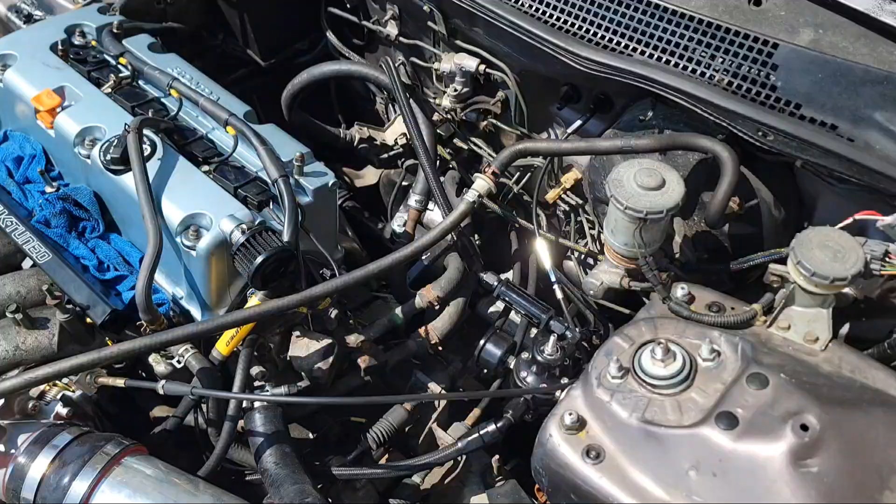So as you can see, it's a K-series. This one is actually on Link. We not only support tuning on Link, but we also are dealers. So if you're looking for some Link products, let us know.

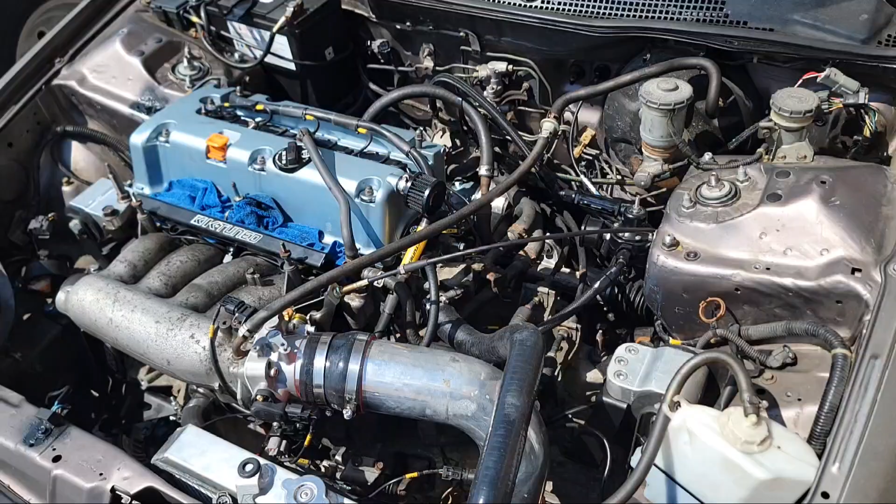So this one came in, as I stated, it was on a trailer. I was under the impression it was running and driving. I will say the customer did ask if we do offer the support once you pay for the tune to help out, but then we never got an email back from him. As far as I saw, I looked at my emails, there was never ever a responding email.

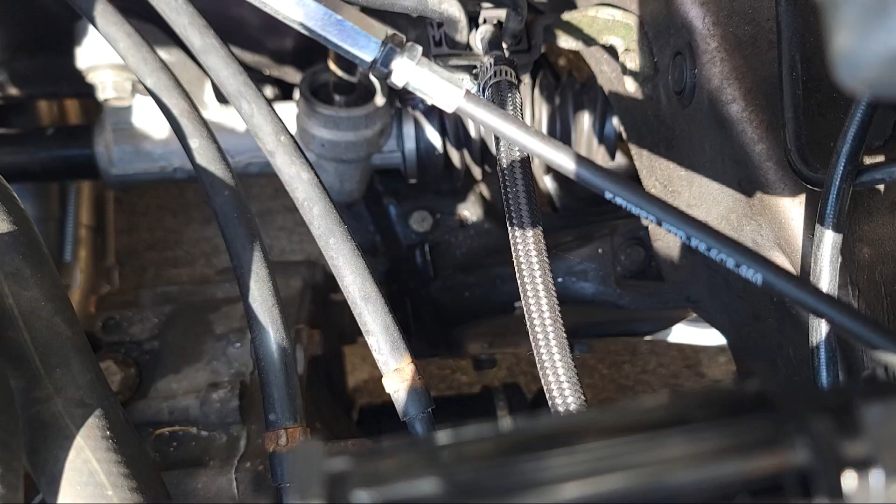So right off the bat, there was a couple things that were wrong. One of the things that we noted was, and forgive me again, I am outside, as you can tell it's bright. I'll do my best to try to remember to turn my camera around and press that button.

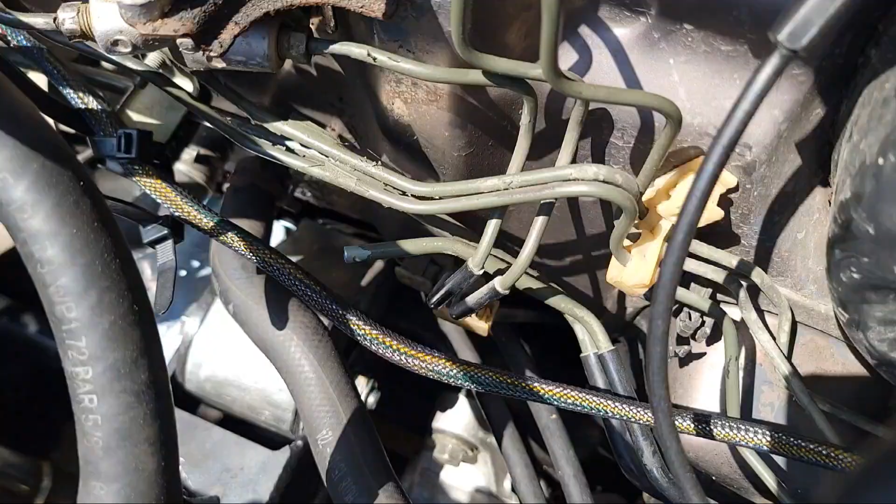If you watched last week's video, then you know what I'm talking about. The fuel line was originally hooked up to the evap or purge canister line. The customer was here, he wanted to stick around and see if we can get it running while he was here. So we did walk in and we asked him, hey, is there a reason why you have it hooked up here instead of the actual return line?

His response was, unless I'm dumb, I don't think I do, something like that. So he walked out, he saw that it was hooked up incorrectly. When we took the line off, the amount of pressure that was built up, it was unreal.

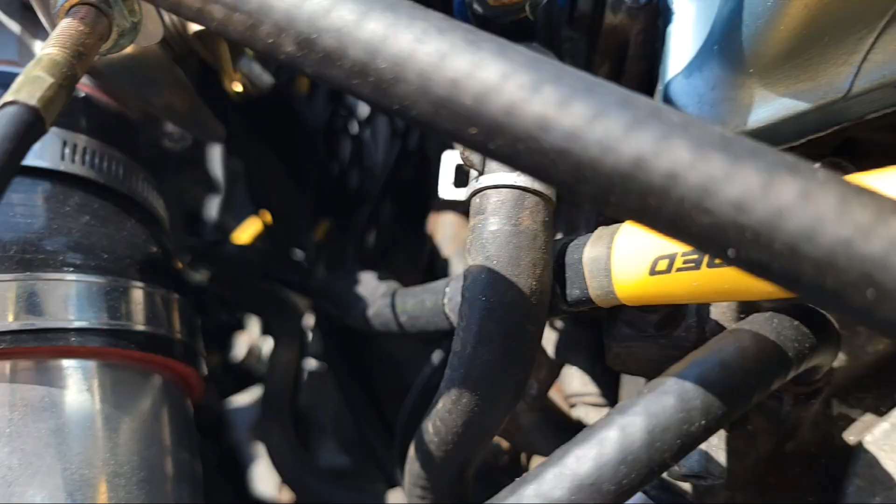The other thing too, I know his IACV was leaking, just leaking coolant. From what we could tell, on the stock throttle body there's like a provision where the gasket sits. Well, there was none on this throttle body, so the gasket was just kind of smashed out, had nowhere to go. So we simply took it off and threw some Honda Bond on it, let it sit.

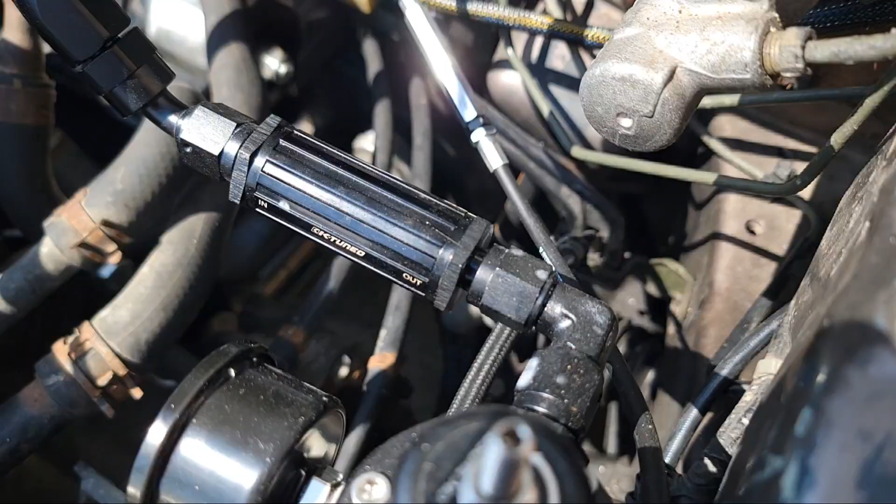There's other little stuff too as I'm in this engine bay. These fuel filters, if this is your first time watching or you're new, these tiny fuel filters, I don't care the brand, don't run them. You run something larger, they get clogged, they're just notorious for having issues.

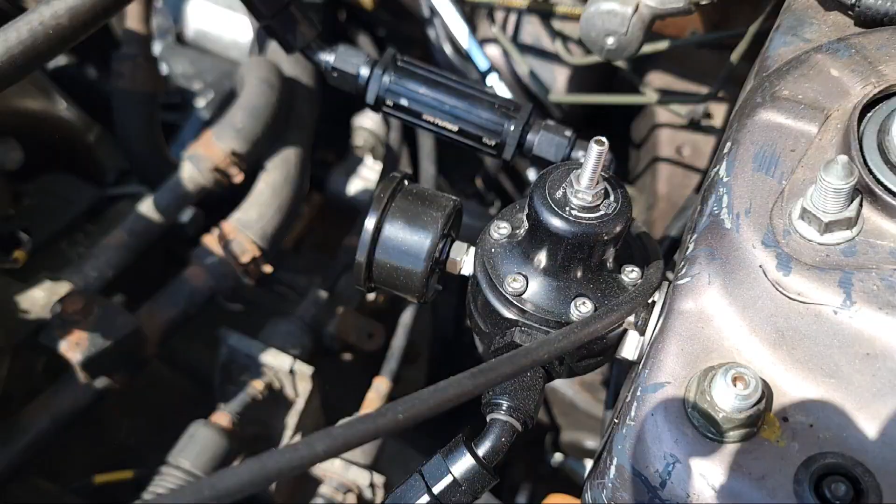I know I have some other stuff too that I'll mention. Oh, the one thing too, when I went to go get in it, he said something like, you know, the car is going to smell inside because his cats have been using it for a litter box. And the window's like RTV'd sealed, so that's kind of fun being inside this car and smelling that.

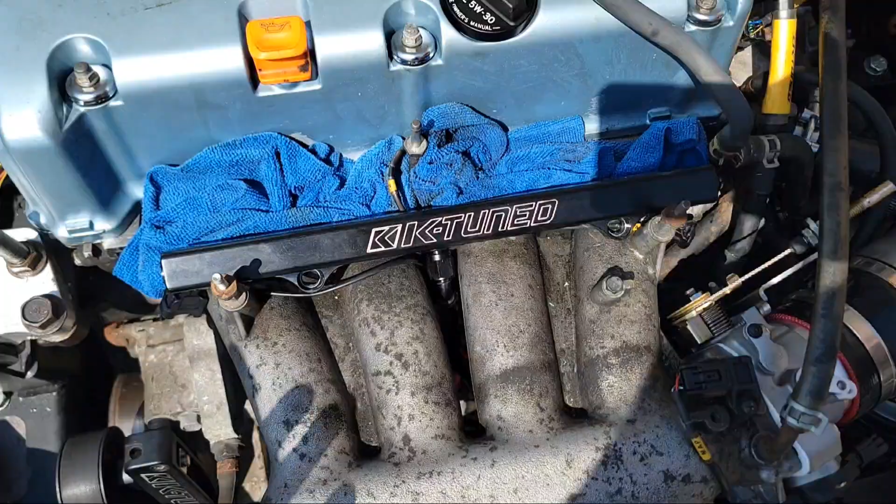We have the injectors out right now because when we did get it started, we were having a bad misfire. Let me get inside really quick because it is too bright for me to even see what I'm doing here. So my apologies, it's really bright, I can't even see my screen, what I'm recording.

As I was saying, we did get it running. Once it was running, it was misfiring badly. We spoke to the customer, of course he heard it because he was in our showroom. He was excited, he said that he did the valve adjustment, the valve lash. He wasn't really confident in it, so that's where we started. It was out of spec. We got that all set up. Still misfiring though, which leads us to now the injectors being out.

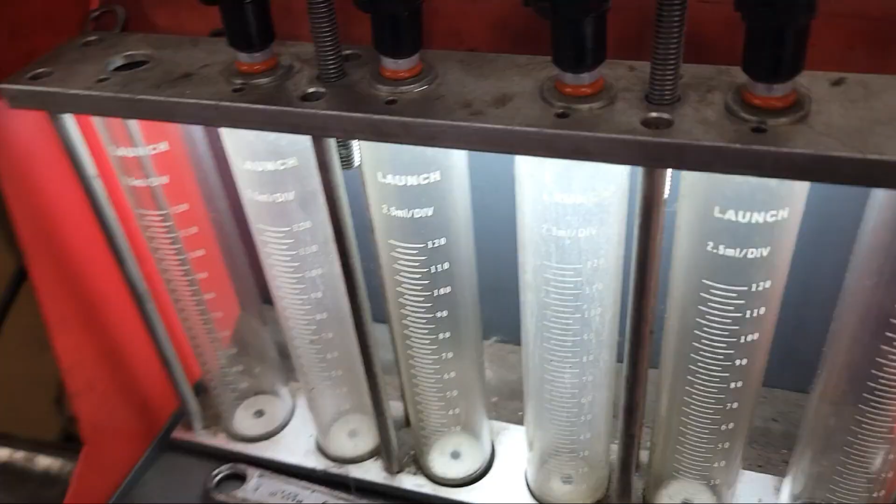We have them in the machine. Let's go over there, show you guys really quickly. So we got the injectors in our machine, we're going to test them. We do multiple tests in a sense. We do a leakage test to see if they're actually closing all the way. Flow test, self-explanatory.

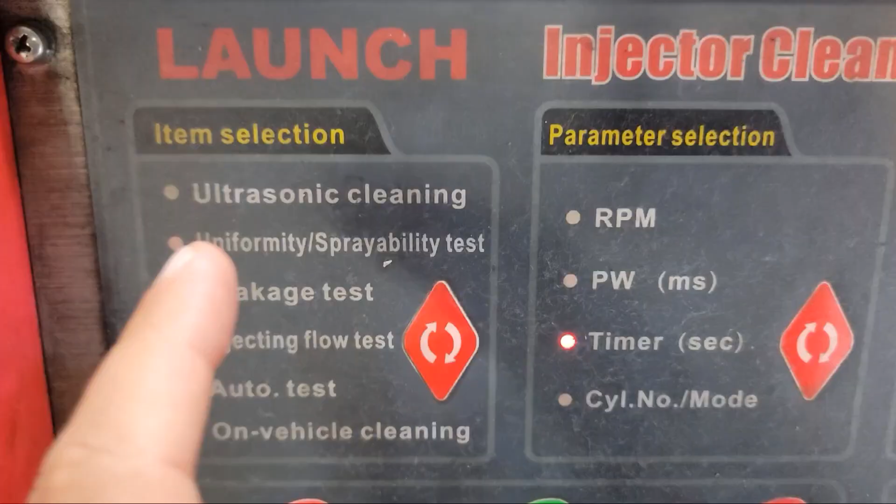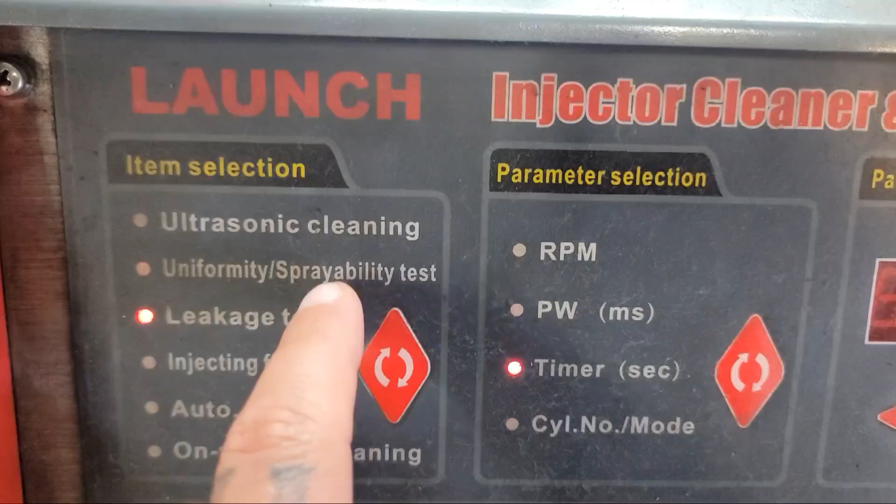Sprayability uniformity test. That's going to basically show how good it's spraying. When you get cheaper injectors, that's one big thing that is affected in a sense. So I'm going to get out of the way so we could do this test, and then I will give you guys the results.

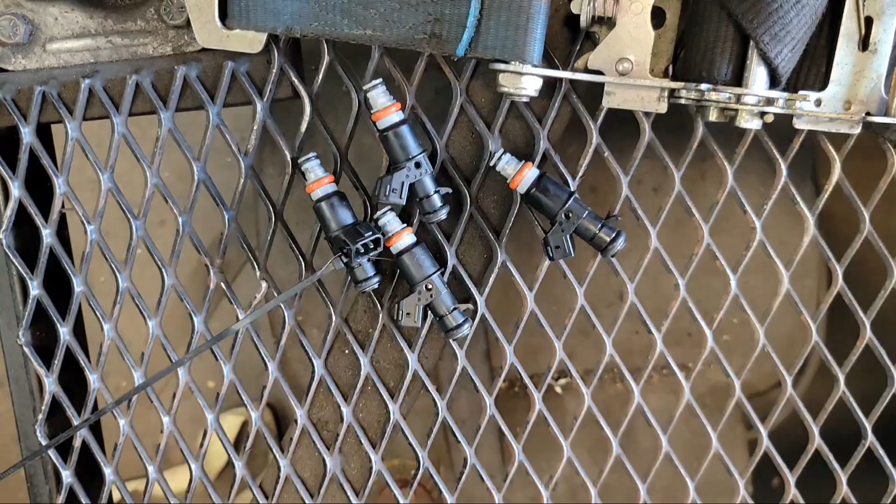So the injectors did fail our test. One of them is completely dead, not firing, which explained the misfire. Customer was expecting this, he said, because these are $70 injectors. So at this point, we're not going to reinstall them. We're going to wait to see what injectors he wants to get and buy. I gave him a link recommendation to Fuel Injector Clinic injectors that we sell and recommend.

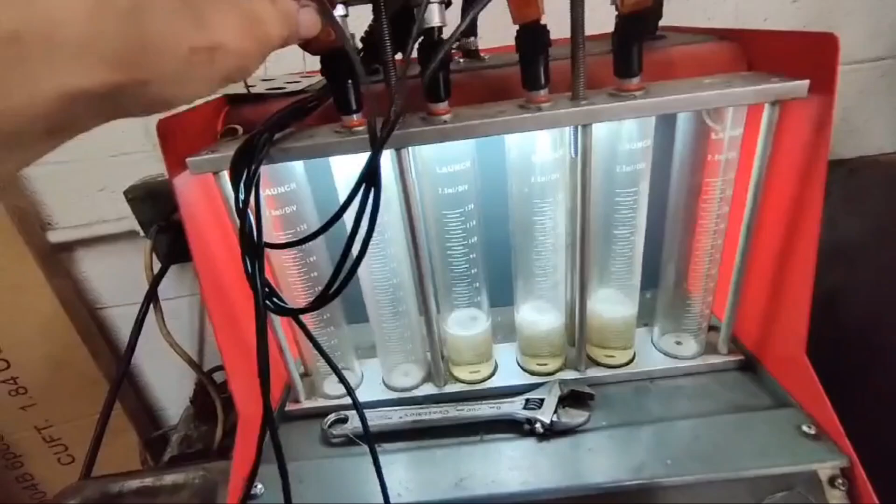So that's where we're ultimately at on this one. If you watched last week's video, I will try to send the link down below, post the link down below. If you didn't, you can see another car that was supposedly ready for the dyno. It is not. And now another car we have to diagnose. And, you know, it is what it is. I really can't say much more. Go watch the other video because it's literally like a repeat. We're going to get on to something else here. Let me go find out what we're going to cover, keep the video rolling and whatnot. So let's see what we got here.

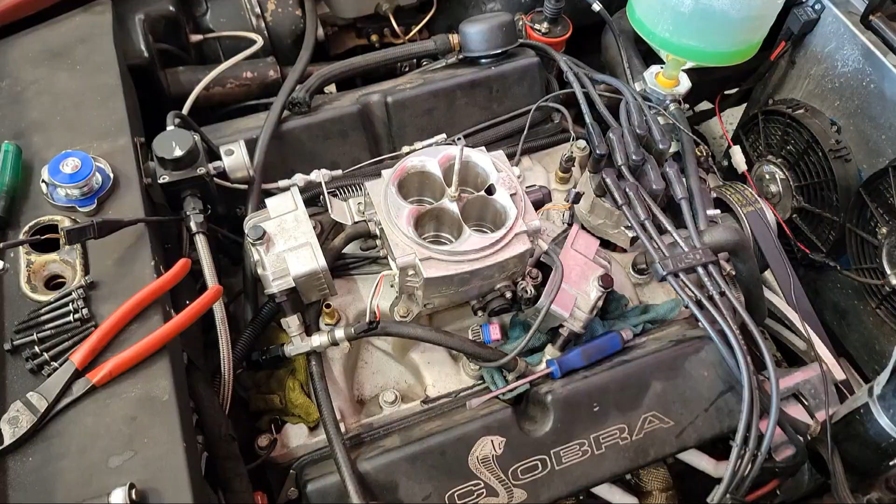So, as you can see, standing in front of the Cobra, we got to take it apart a little bit. Got the sniper unit and the injectors out. And we have my cable because I built a tune for the car. So let me give you a little bit of an update on this.

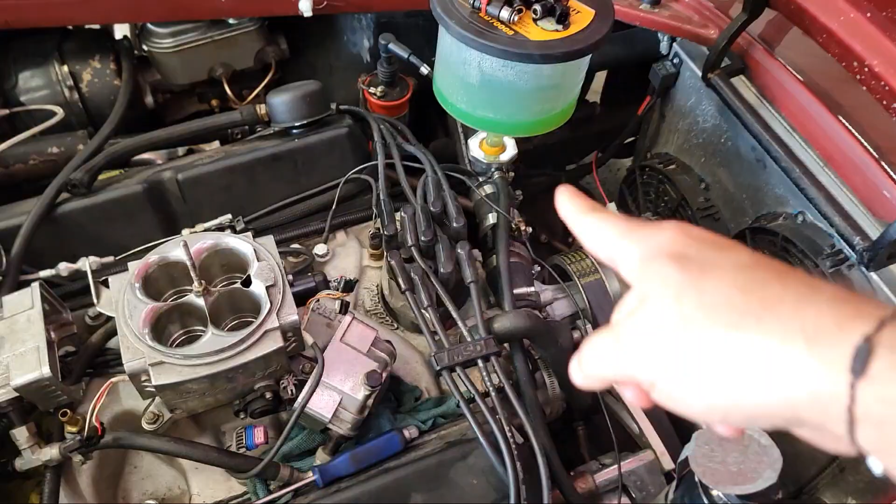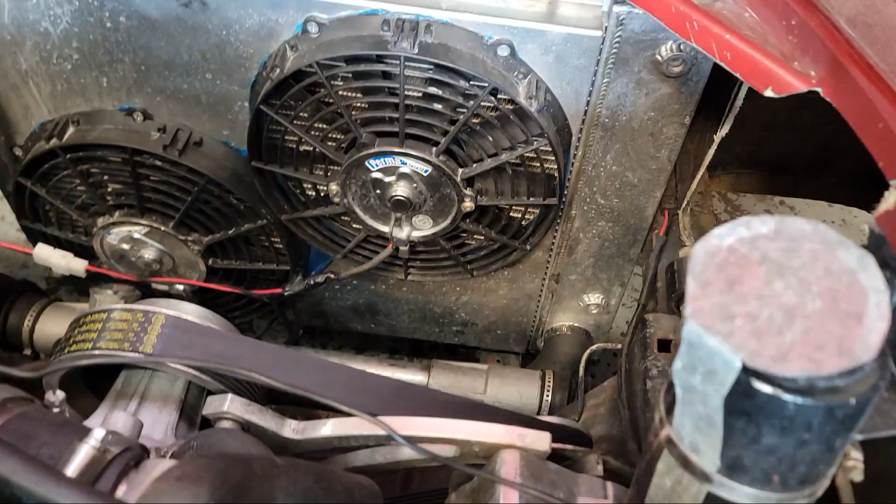We finally got a water neck that actually would accept the funnel. There's really no other way to bleed this car. I talked to the customer. Realistically, what should be done is if this car goes down, let's say for the winter time, the radiator should be modified so we could basically make a swirl pot. Right now, we don't have the time to fully take the radiator out, make a custom swirl pot. Probably going to need some custom flanges made for the water necks, all that fun stuff.

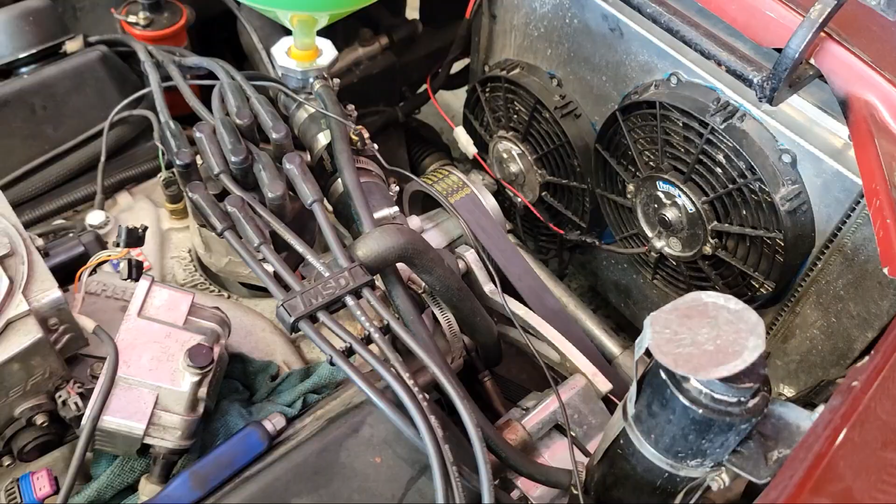So going back to it, we added coolant. The engine, the setup alone was just low on coolant. That wasn't the only problem, but it wasn't helping. I don't know if the other shop just did not bleed it out. I don't know, I really can't say. Once again, if you've been catching my recent videos, I'm only presenting what's in front of us, and you can be the investigator on why did the other shop not fully fill it with coolant. It could have a leak too somewhere, but right now we're not seeing any leaks.

So anyways, we had it running and starting on my tune. So the air fuels are running a lot better. If you don't remember, and I will shoot the link down below to the one video I did on this car, the air fuels just at idle were running super lean, and ignition timing also was reading about 2 degrees at idle. So that is fixed. The car is running a lot better. It doesn't want to overheat as fast as it was. We let it run for about 20 minutes. It did not overheat, but the car also, the engine has a misfire. So that's where we're at right now.

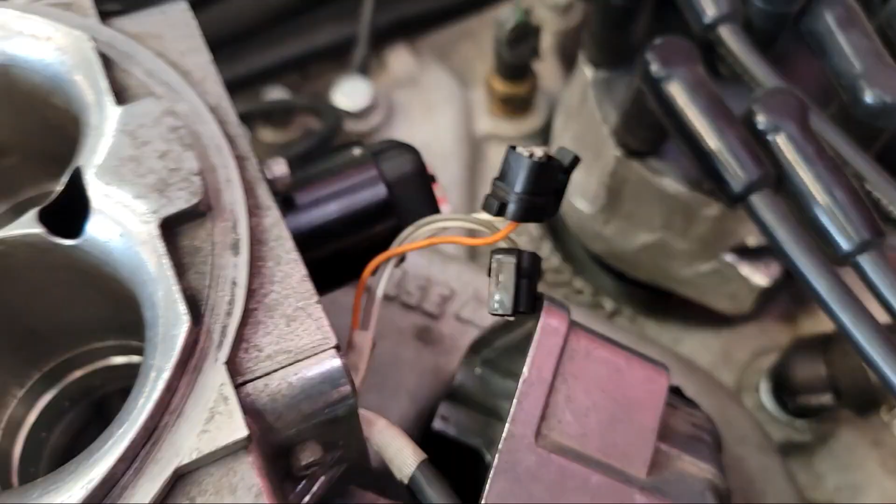Now, if you're familiar with the sniper units, then you already know what I'm about to say. If you're not, well, these injector clips that Holley installs are a horrible design. Not only are they not serviceable in a sense, you can see how they look completely sealed. They're super fragile, they like to rattle loose and then cause a misfire. And before we even took the injectors out and the clips, you can see that clip right there is going to break.

So we're hoping this was the issue. The injectors tested good. We're hoping this is the issue, and the only real solution is to zip tie these on. So we're going to zip tie them on. We're going to get it started back up. We're going to see if the misfire is gone and proceed from there.

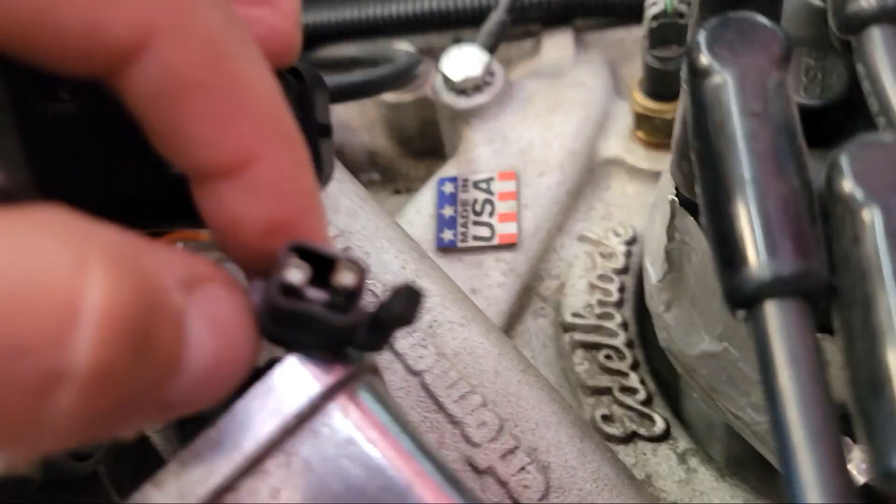I'm going to show you, though, I talked about this before. Let me show you the previous tune that was on this setup, and let me go over some key points on why it's not appropriate.

Okay, so I have the program open. I have his original tune that he sent me, and I want to go over this now. I'm going to go over some basic stuff.

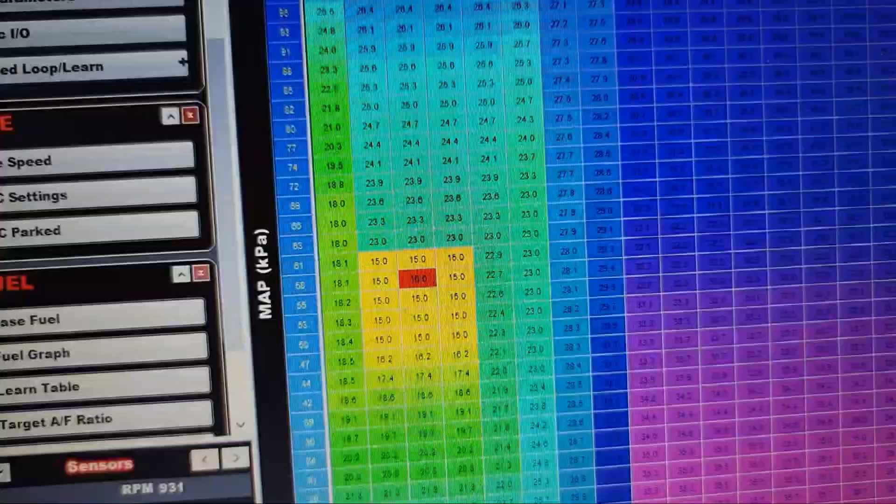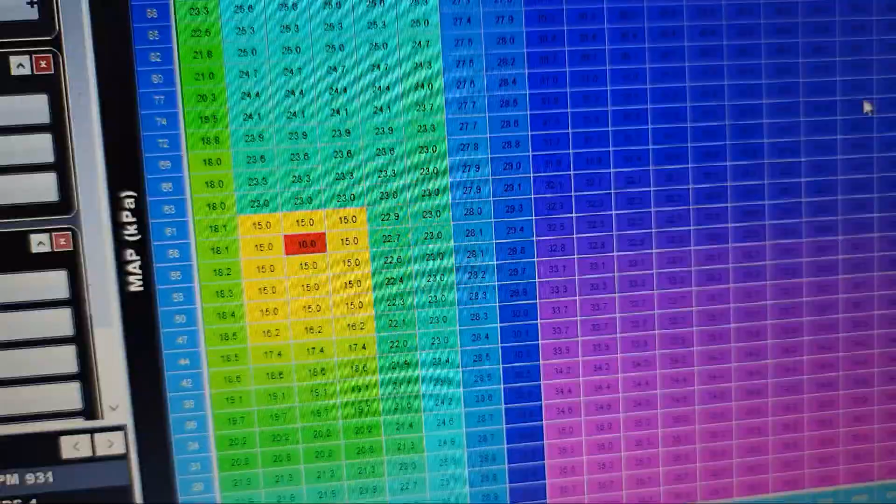There's other stuff too that was messed around with in the tune that you should never, ever mess around with. Why it was messed with, I don't know, and neither does the customer. When I was speaking to the customer about his previous experience at other shops, his response was that the guy who tuned it is supposedly a well-known tuner, and he informed me that when he was asking him questions, the tuner himself acted like... don't question me, in a sense. You're an idiot for questioning my knowledge.

And that's the whole thing. I don't care what you're doing, in a sense. Once you act like that, you need to get out of the industry. You need to get out of the car stuff as a whole. Your job is not only to tune, but it's also to educate and inform your customer. That's my mindset. For anybody to act like they're better than somebody just because, for whatever reason, it's not okay. It's not right. I'm a strong and firm believer in that.

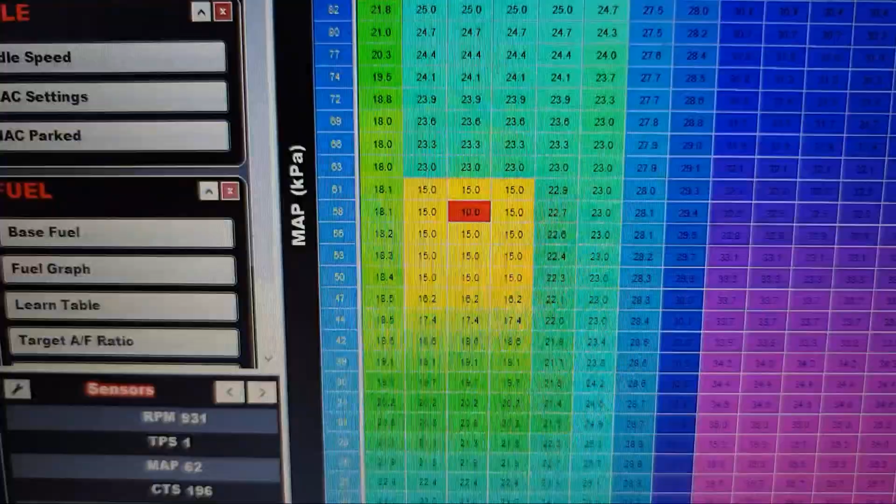What we do, every industry has their own person. Let's talk about a chef. Do they know how to do certain stuff with experience? Sure. Can somebody else learn that over time? Yes, of course, absolutely. It's the same with welding, same with engine builds. When you start acting like you know everything and question it, I don't know, man, it's really hard for me to describe without swearing. Let me flip this around. Hopefully you guys get what I'm saying. It just upsets me, it truly does. But going back to this.

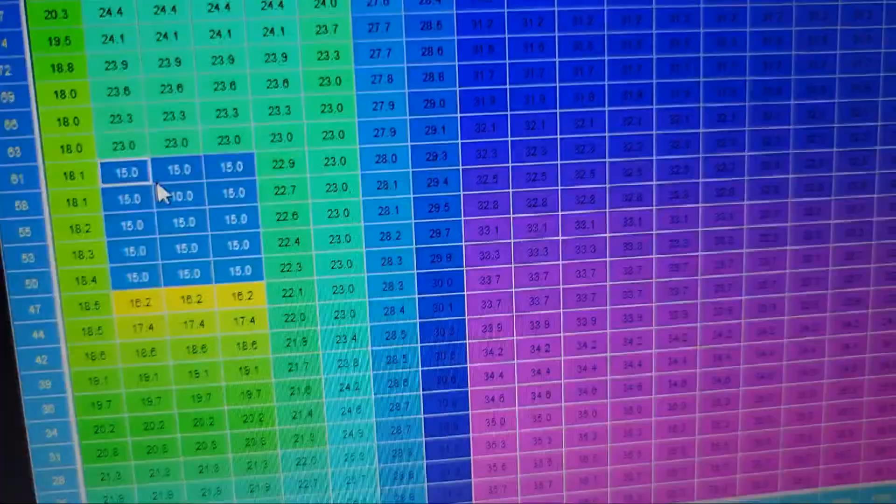So we're at the spark table here, and you see how the spark is laid out. No clue why that 10 is in there. But here's the other thing: if this was a normal standard vehicle, yes, it would be idling possibly around here, or more so in this area, it could be idling up here. But what I'm trying to say is this block of squares - a normal car would idle around that block of squares. This is not a normal typical car. It has a cam, it's rowdier than most.

So realistically it's going to probably idle around here, depending on how fine-tuned you can get the idle to be. Some cars, no matter what, depending on the setup and the cam, it's going to want to fluctuate. So what I'm trying to get at, and have you guys think about here, is it's going to fluctuate from here to here to here, possibly maybe even down here. So the idle is going to be bouncing around this whole time, which is not ideal. And like I said, why does he have a 10 in the middle here? No clue.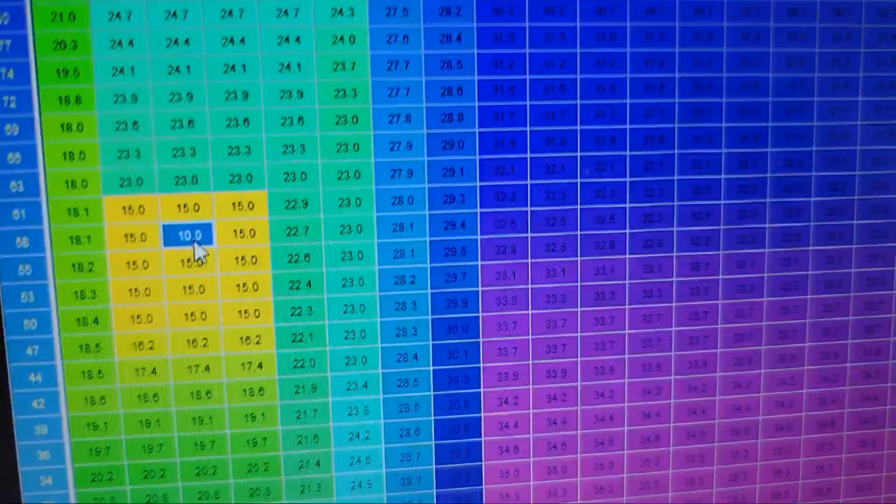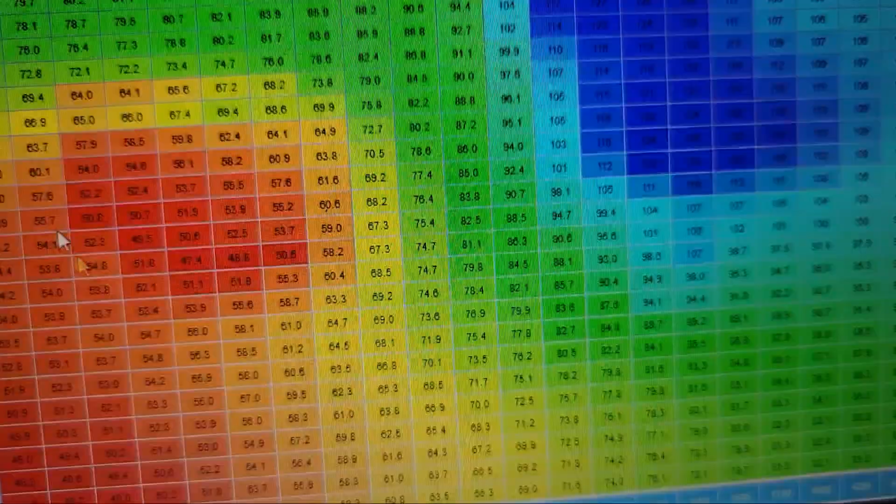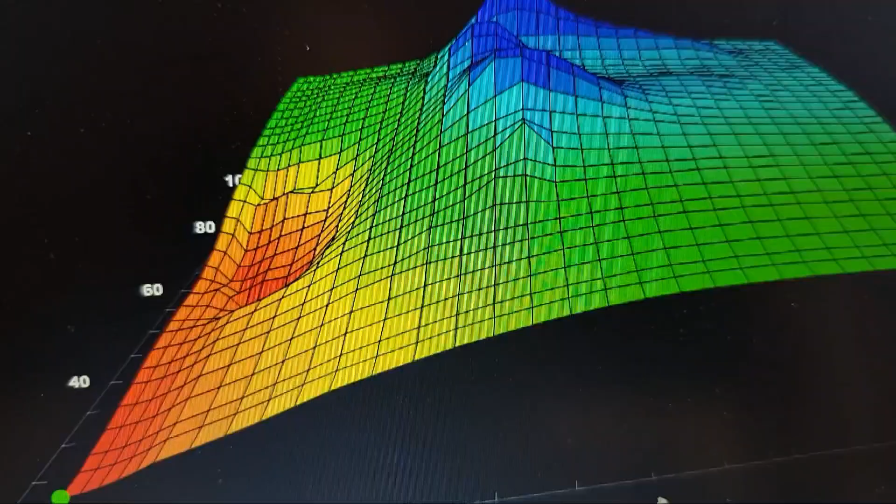Let's open up the fuel injector side of things - the fuel map. Okay, so this is the fuel map. Now if you don't do this day in and day out, this may kind of look normal to you. This little area is going to be where it's idling and whatnot, but let's change this to a 3D version of this. Okay, so if you're not familiar with how a fuel map should possibly look, I don't want to go into the crazy detail, but this area could definitely be a lot cleaner. Let's just say that, let's keep things simple.

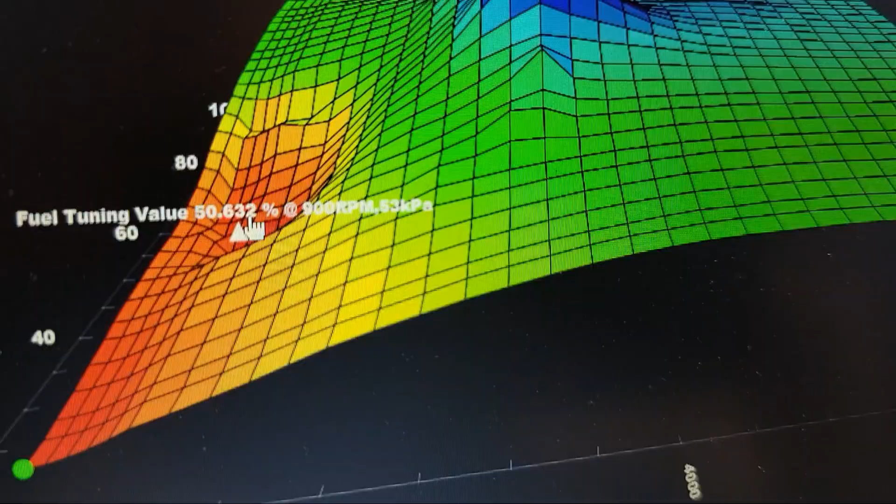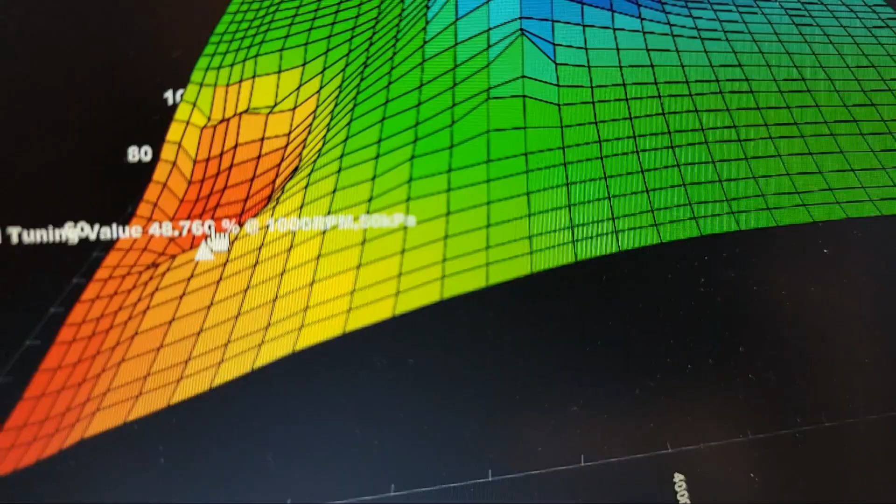But now you see in the idle area how much fuel is being pulled out, which right off the bat, as somebody that does this day in and day out, this little area would possibly raise an alarm. Now, once again, if the tuner was open with the customer and informing him, giving him his knowledge of 'hey, I did this because of such and such,' but he didn't. Now keep this table in mind, because this is a big part that's coming up.

So, before I show you this next table, I'm going to add here: most people that don't do this day in and day out are under the impression that the car should idle at an air fuel ratio of 14.7 - that's where people think every car should idle. That's not the case, and I spoke on this a couple videos back when I was doing this car. V8s like to be a little bit richer in certain areas. It is what it is.

It comes down to a point where you're not chasing a number at idle, you're making the car happy. If the tuner told him, hey, this is what your car wants at idle, this is why I did it, just to be open about it. But once again, the tuner was cocky and acted like, how dare you question me? Let me show you something highly important here, the biggest part of it all.

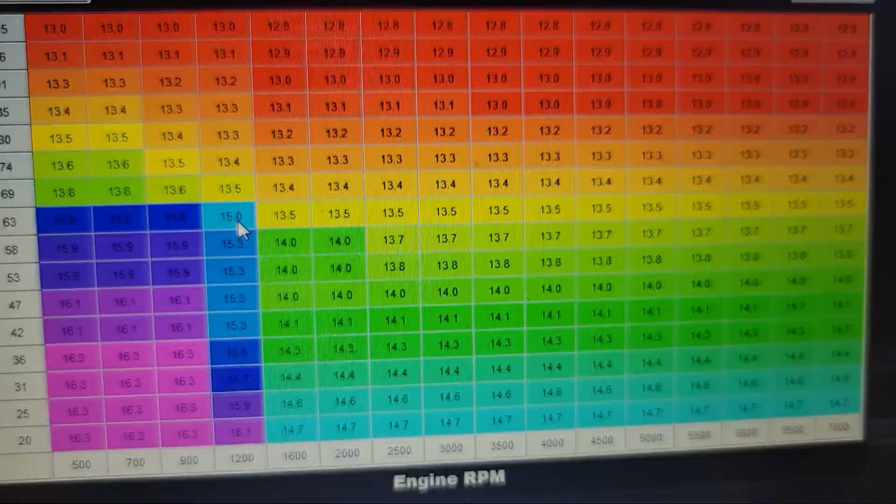So this is the big shocker to me, and it makes absolutely no sense. This is the target air-fuel ratio, what the computer is going to target in closed loop, or as Holley calls it, their self-learning system. That's how Holley advertises it. I talked about that before.

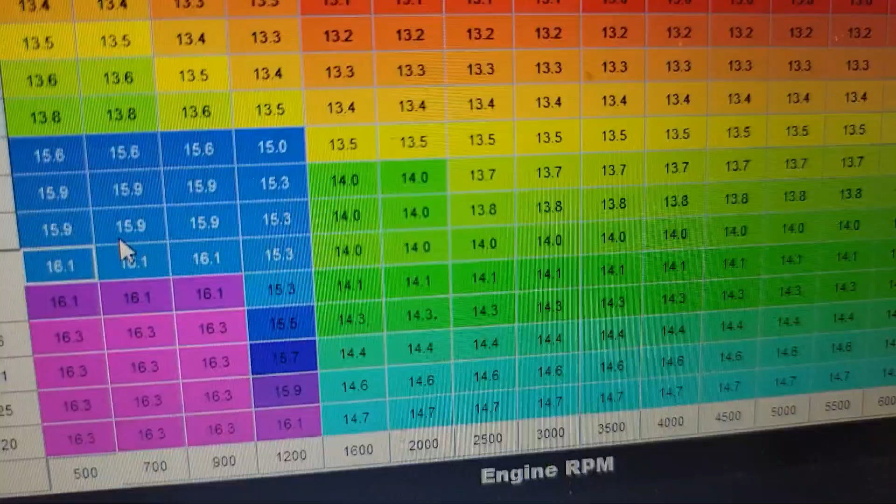Most people think 14.7 is where you want to be at idle. If you're not familiar with air-fuel ratios, the higher the number, the leaner the car is. At idle, we're roughly going to be around here, give or take, and it's commanding 15.9, 16.1. If you go back, I'll have the link down below to the first video I did on this car, you'll see it was idling at 15.9, 16, even higher at times, as the car was trying to stabilize itself.

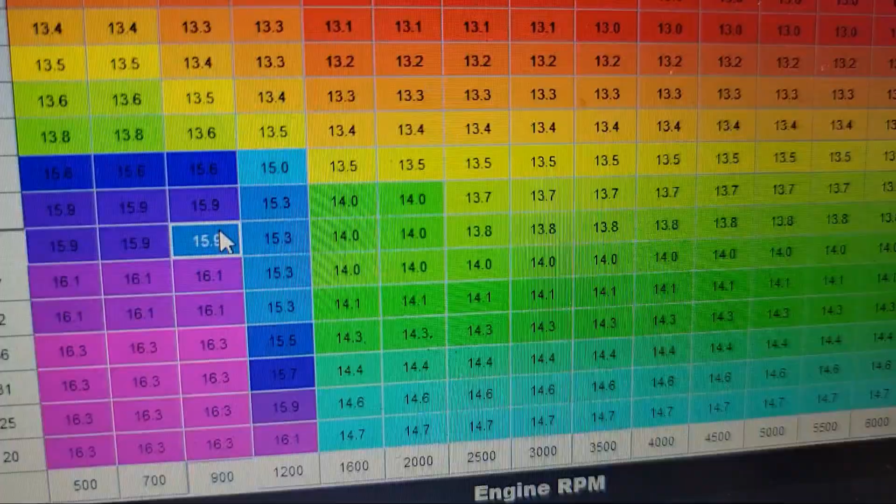That alone, and I spoke about it before, is going to make the engine possibly run hotter and cause an overheating issue. So think about this.

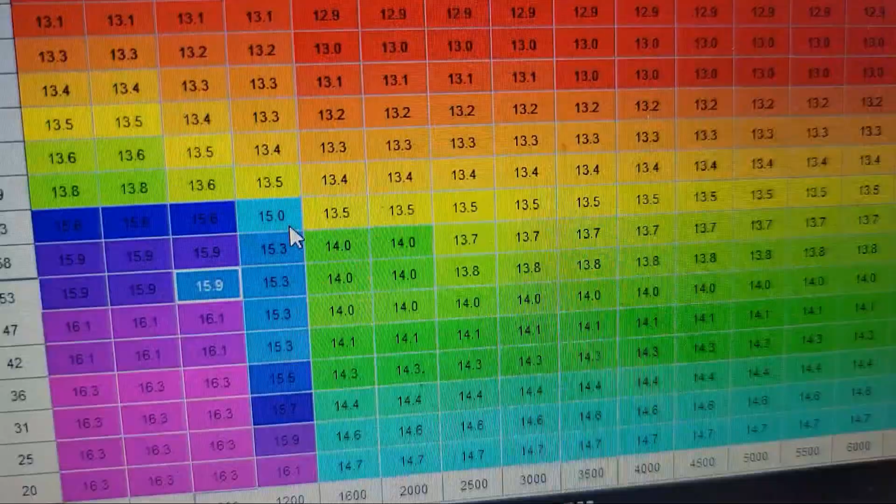Think about it as a whole. This guy has 3 radiator fans on the car. Number one, at the 3rd radiator fan, when you're installing it, there needs to be a point in your head where it's like, hey, I'm band-aiding the issue. What is going on here? Now there could be some other stuff involved with this overheating. I'm not saying it's all on the tune, but the tune's not helping.

I will add that I already have my custom tune on it, and I've been dialing it in at idle. The car, it's a night and day difference, not only how it feels, but how it sounds as well. There's other stuff in here too that just makes absolutely no sense. I don't know why somebody would do it, if it comes down to just being lazy. I truly do not know.

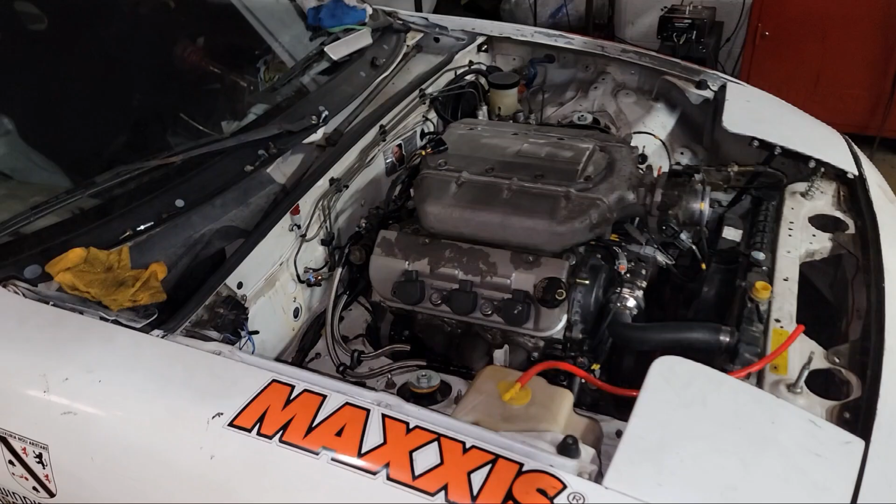Give me one second here. I wanted to take a break there. It really angers and frustrates me, I don't care what line of work you do, when you act like you're better than people and you can't give them proper information.

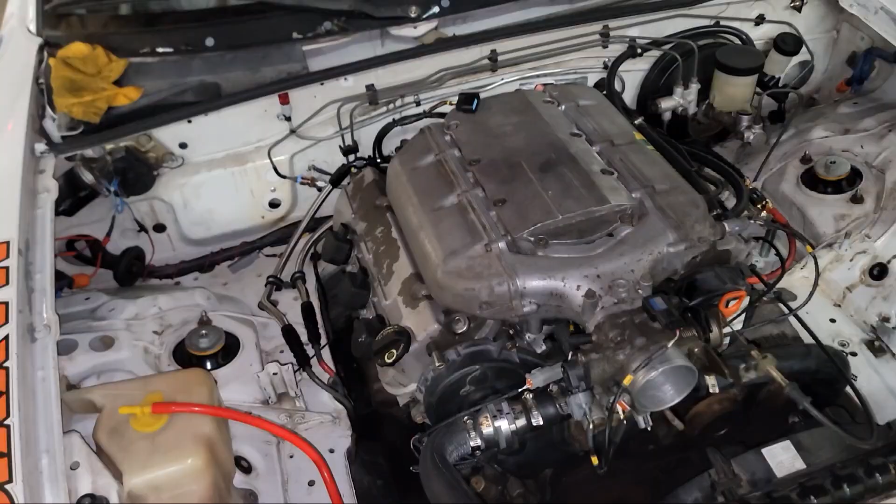I want to go back to this one really quickly, we had some people asking about it. This kind of goes to what I was talking about. We went to try to fire this thing up, and it turns out it's basically not the J-series we thought it was. Speaking to the customer, there was some confusion on his end, and he apologized. What it comes down to, though, is we know it wasn't his fault, and he knows it's not our fault. It's communication, just understanding each other in a sense. So we have to basically modify the trigger wheels to make this thing want to fire. It is what it is, we'll get it done.

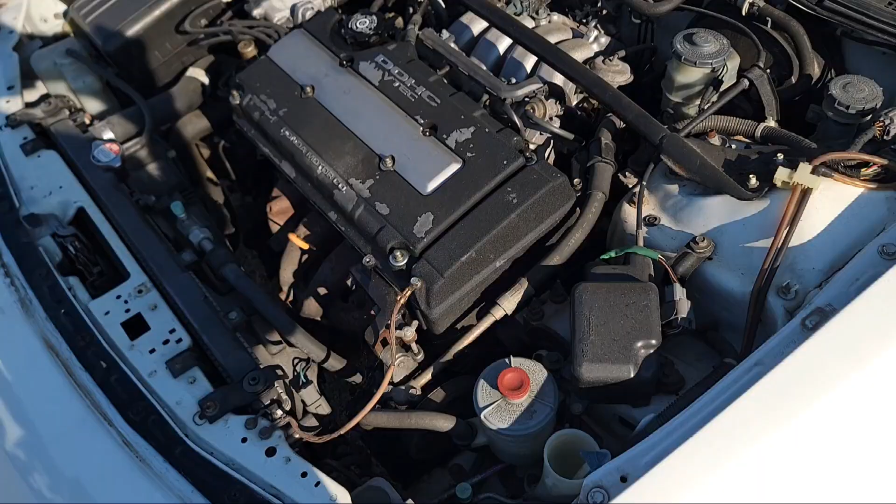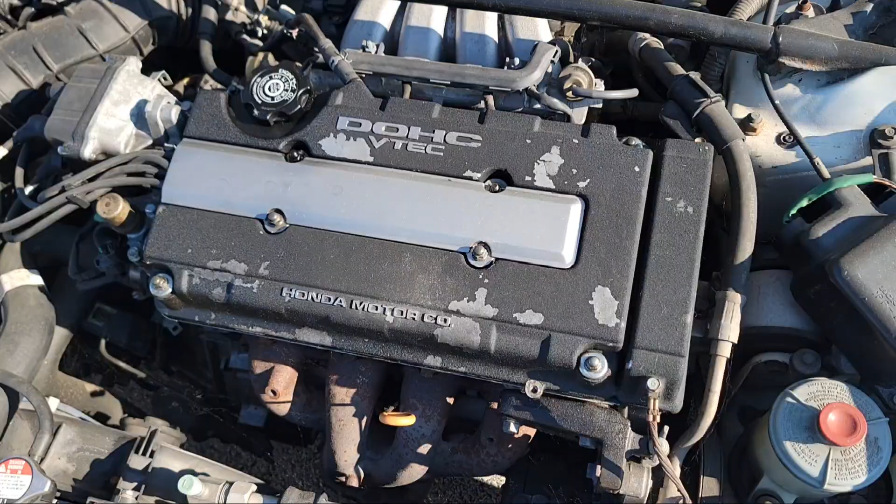Just want to switch gears really quickly. This car was just dropped off on a tow truck. Customer said the timing belt has snapped, so he wants to know if the engine's good. So we're going to do a leak down test on this, see if any of the valves got bent during the timing belt incident.

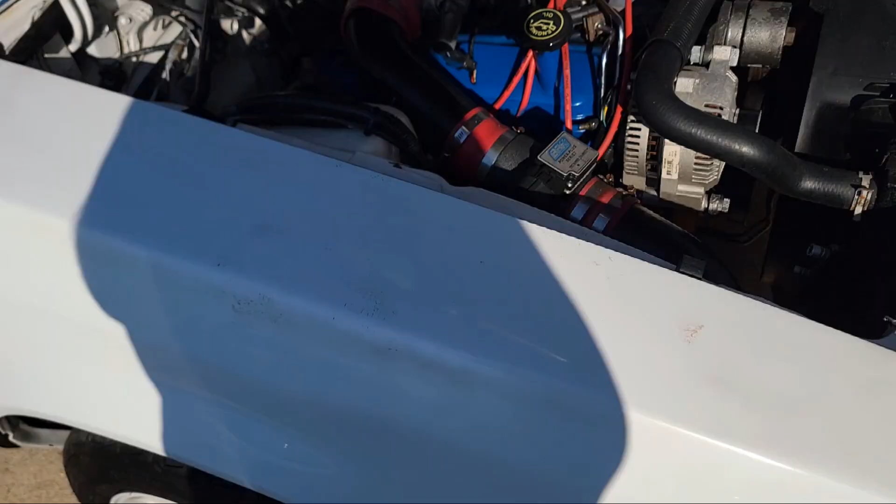And despite what some people still ask us, yes, we work on American cars as well. So this Mustang was actually just towed in a few minutes before the Integra. So this one's getting a shakedown and came in with an overheating issue.

So we're going to do a full shakedown on this vehicle. Spoke to the customer, if I recall, I could be wrong, but I think he said it was his uncle's, his late uncle's car.

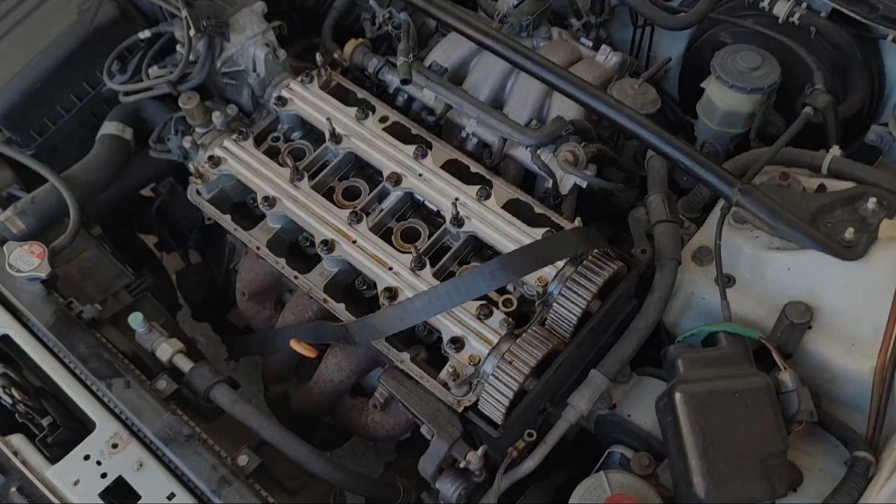But now, since this Integra just came in, let's go back. Getting the valve cover off, let me update you guys. So we got the valve cover pulled off, and we're trying to get this belt out so we can rotate. We're going to rotate the cams and the crank pulley slowly to get it over and top dead center per cylinder that we want to do a leak down.

Now, before I do the following videos to show you the results, any guesses? You think this engine's going to have good leak down, or do you think a valve hit a piston? Put your guesses in now, and I'll be back.